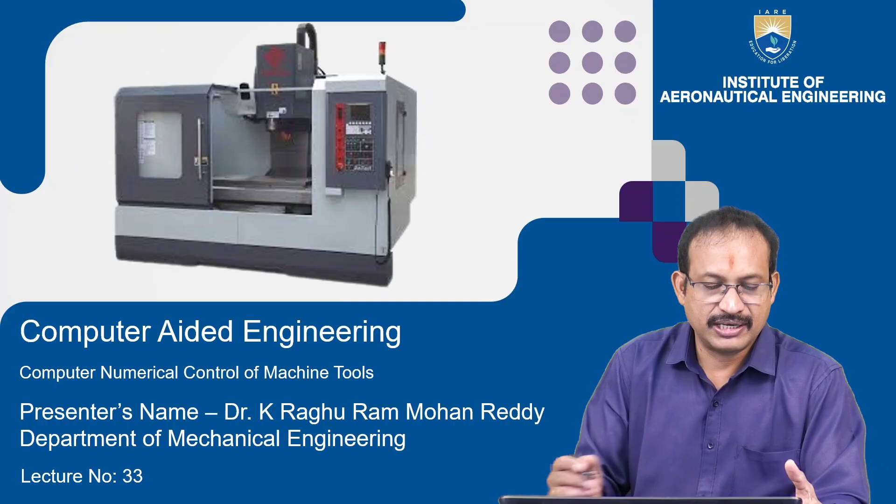The course is Computer Aided Engineering. The topic is Computer Numerical Control of Machine Tools, lecture number 33. In my previous presentation, we have seen the special construction of NC machines. Above NC machines, we have CNC machines. In this lecture, students will be able to explain computer numerical control of machine tools.

CNC. Already we have seen NC means numerical control. That means this is somewhat hardwired. But whereas computer numerical control is software. We'll see.

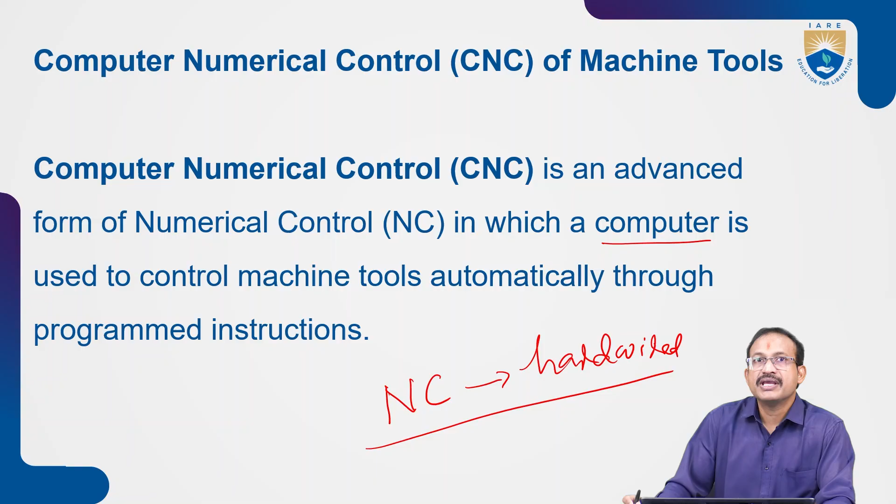Computer numerical control, CNC, is an advanced form of NC control, in which a computer is used to control machine tools automatically through programmed instructions. That's why I told NC is the hardwired. Here we are using a computer. In CNC, we are using computer to control machine tools automatically through programmed instructions.

In CNC systems, machining operations are controlled by computers, software programs, electronic control systems. What are these? Computers, software programs must be built in those computer systems. Electronic control systems to control the machine movements. These will be driven by the computer setups and the software programs.

Computations and all these things will be performed by computers. Software programs will execute or implement the work through the electronic control systems. So the machine performs operations automatically with high precision and repeatability. So this is all about the CNC, computer numerical control.

When compared to NC machines, CNC systems are advanced. Here we are using a computer system, software programs, and electronic control systems. There also we are using program of instructions, but there it receives the program of instructions on the punch tape, olden technology. But here the technology is advanced.

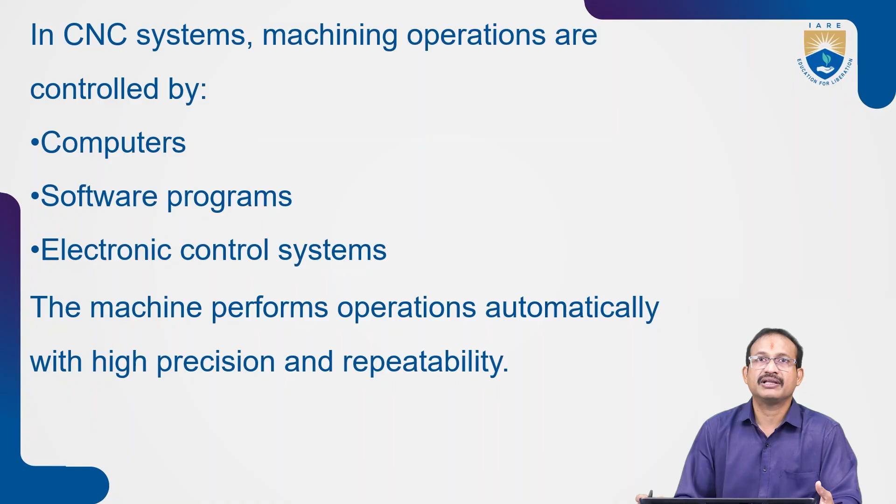Here we are using computers and software programs. So prefixed programs would be available in the machine itself for regular operations. Else the operator or the manufacturer can write the program and build it in the computer systems for repeated operations. We'll see the definition of CNC.

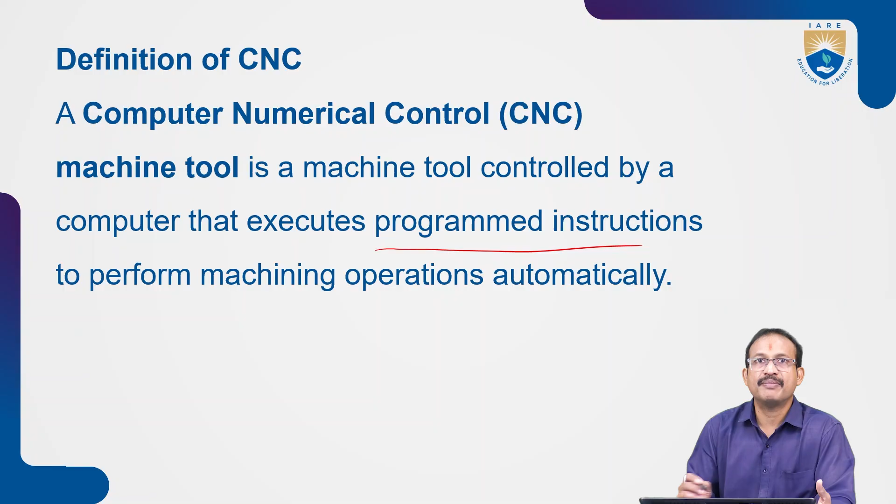A computer numerical control, that is CNC machine tool, is a machine tool controlled by a computer that executes programmed instructions to perform machining operations automatically. So here no human intervention. The program of instructions will be received by the machine tool through machine control unit, and the machining operations are performed automatically. Basic concepts of CNC.

In conventional machines, the operator controls machine movement manually. In traditional machines, the operator has to control the machine movements manually. In NC machines, instructions are given through punched tapes.

These are not reliable. Why? Because we are punching on the tape, so we are using those olden punch tapes to receive the program of instructions in the NC machines.

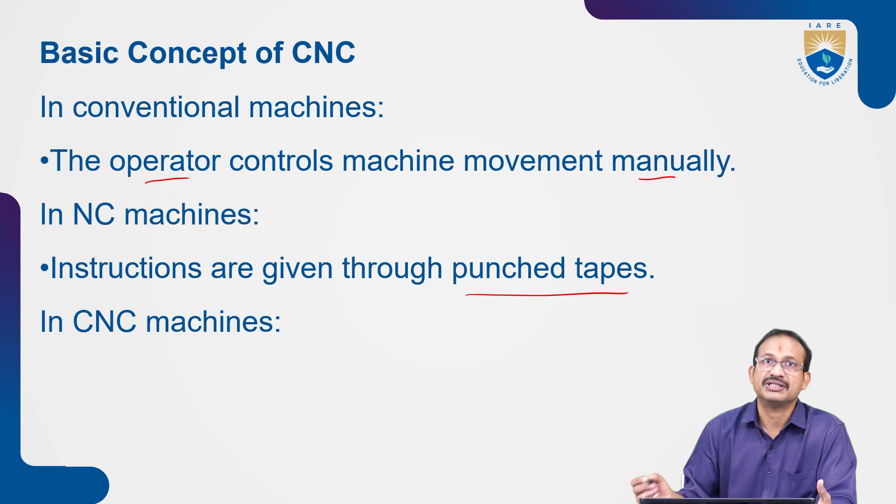But in CNC machines, the computer controls tool movement, feed rate, spindle speed, tool changing, machining sequence. A computer stores and processes machining programs digitally. The computer controls all these things: tool movement, feed rate, spindle speed, tool changing, machining sequence. All these are taken care of by the CNC machines.

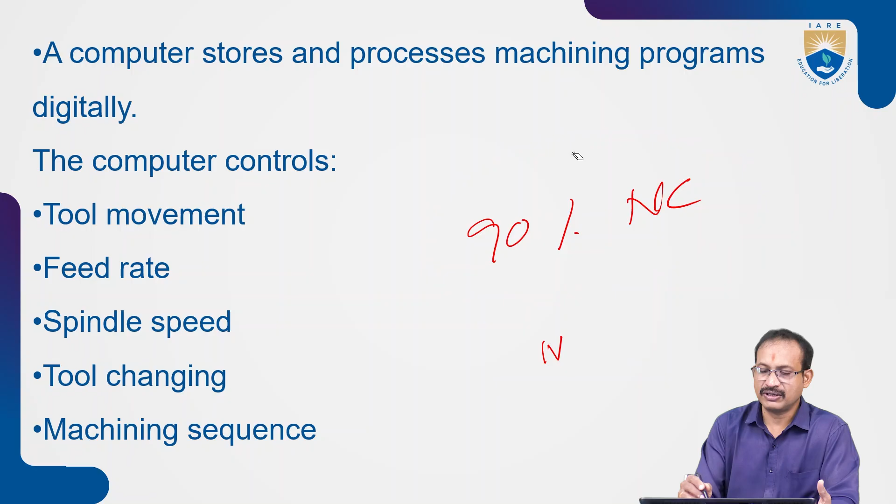Almost 90% is similar to NC, but additionally here the computer systems and the corresponding software systems, along with the high-end electronic systems, perform all these tool movements, feed rates, spindle speed, tool changing and machining sequence. Here tool changing is not in NC. All other things are as usual, but tool changing is not in the NC.

Even high-end tool movement and feed rate are also not possible in the NC machines, but here, when compared to traditional machinery, these are okay. But when compared to CNC, NC machines are a little poor.

Evolution of CNC technology: conventional machines were fully manual operation. Numerical control, NC, introduced numerical programming, used punched tapes. This is the problem here. Computer numerical control uses computer memory and software, more flexible and accurate. Here the program of instructions are not through punched tapes in CNC machines.

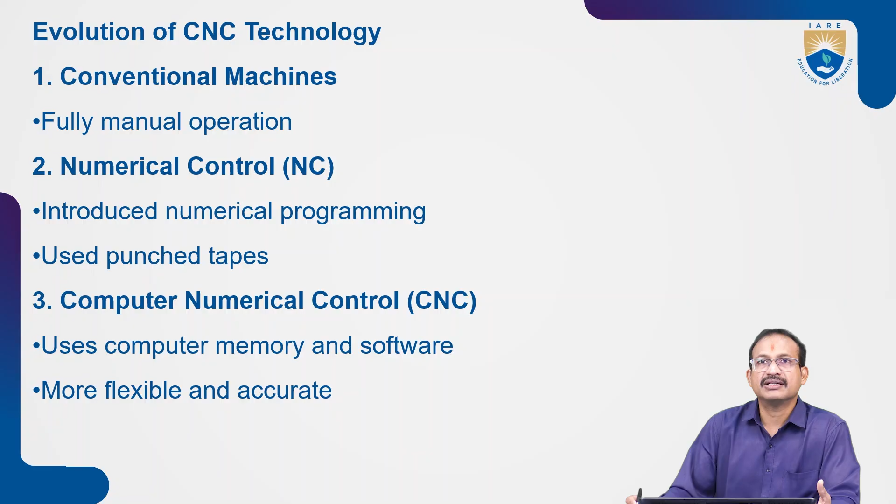We can give the code in the pen drive itself. The machines can take those inputs and give the work. Right. Main components of a CNC machine tool: input device, used to enter the program into the CNC system. That is the tape reader. Examples: keyboard, USB drive, network transfer, CAD/CAM interface, or tape reader will take the input.

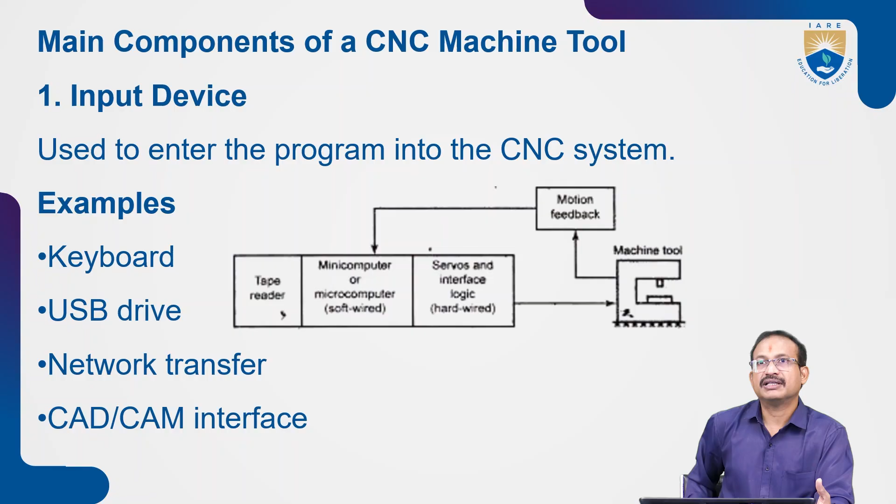First we have to give the program of instructions to these CNC systems through input devices: keyboard, USB drive, all this. How will this tape reader work? What does a tape reader do? It reads the tape. Earlier we used that one, but later it changed. Okay. Now, the machine control unit.

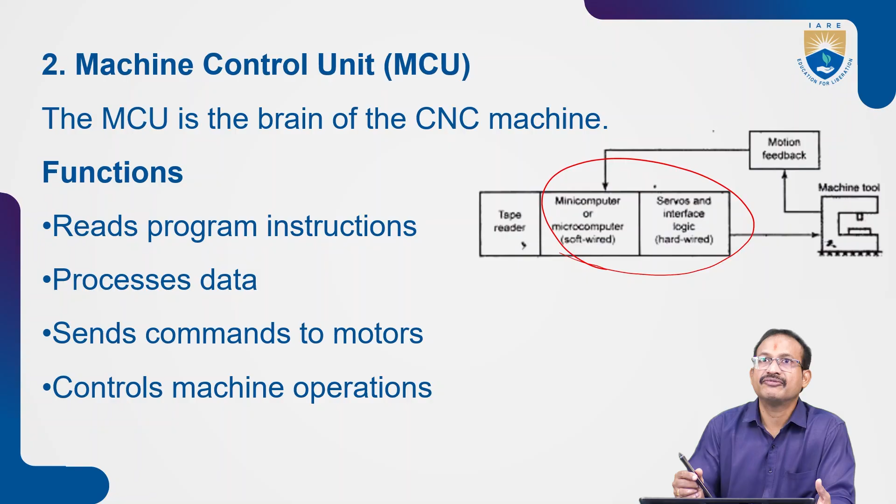The MCU is the brain of the CNC system. Functions: reads the program of instructions, processes data, sends commands to motors, controls machine operations. So CNC machines have software and hardware. The program of instructions will be received by this MCU, and it transforms this program of instructions into electrical signals. So through these servo systems and hardware and software systems, it will operate the machine tool.

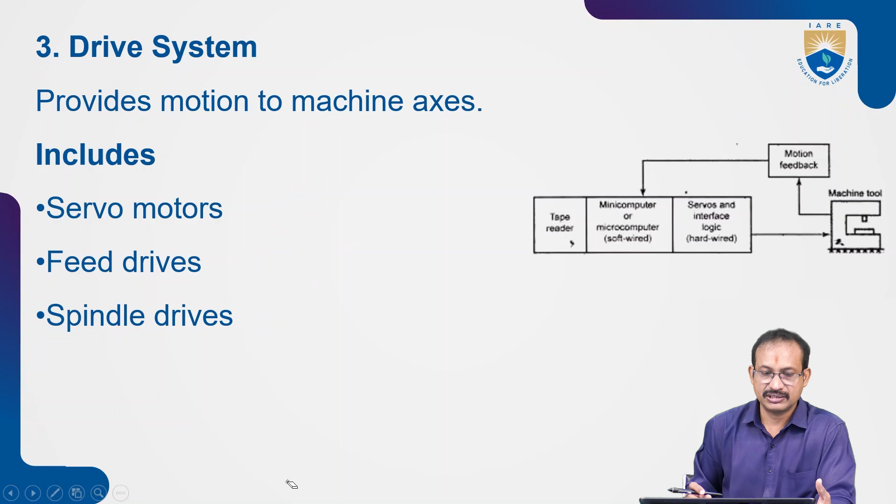Drive system provides motion to the machine axes. Various drive systems will be inbuilt in the machine control unit and machine tool setup, so that servo motors, feed drives, and spindle drives will be operating through this drive system. Machine tool, this one is final. The machine tool comprises all these setups, the drive systems. These drive systems will be activated through the machine control unit's instructions or orders. The machine control unit converts the program of instructions into electrical signals.

Machine tool performs the actual machining operation. Types: CNC lathe, CNC milling machine, CNC machining center, and CNC grinding machine. CNC means computer numerical control. In the present days we are using CNC; we are not using NC machines nowadays. All those NC machines became obsolete, outdated.

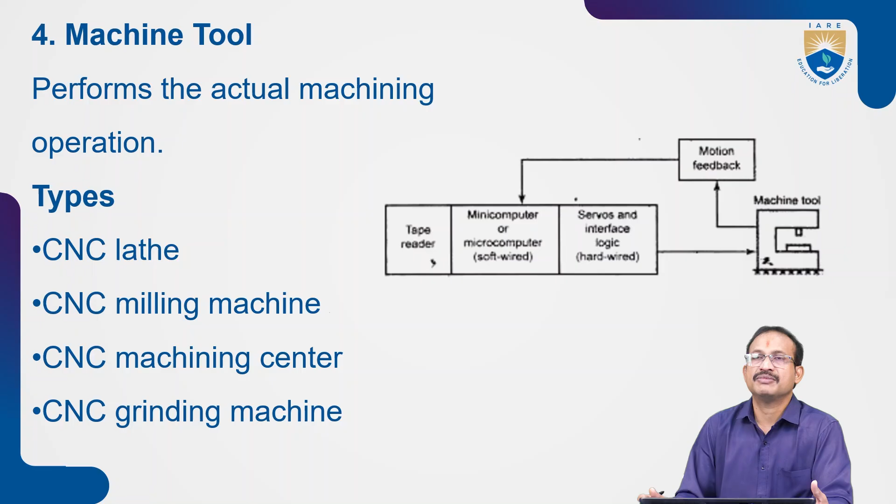Now we'll see the feedback system. It measures actual position and speed. Let us say this is a workpiece. I want to start my work from this point to this point. We have to bring the tool from home to this position. It has to measure whether it is reaching the desired position or not. It has to check, and the moment it receives, it gives the feedback, motion feedback.

Point zero zero one is the deviation; like that it may give the signal. If it is exactly on that point, it will give 0, otherwise it will give the deviation. So the feedback signal will give the deviation. The machine control system, with encoder support, will correct this so that the tool will be positioned exactly in the desired position. And even speeds: suppose the required speed is 900 rpm. The moment we start, it may have 899.95 rpm.

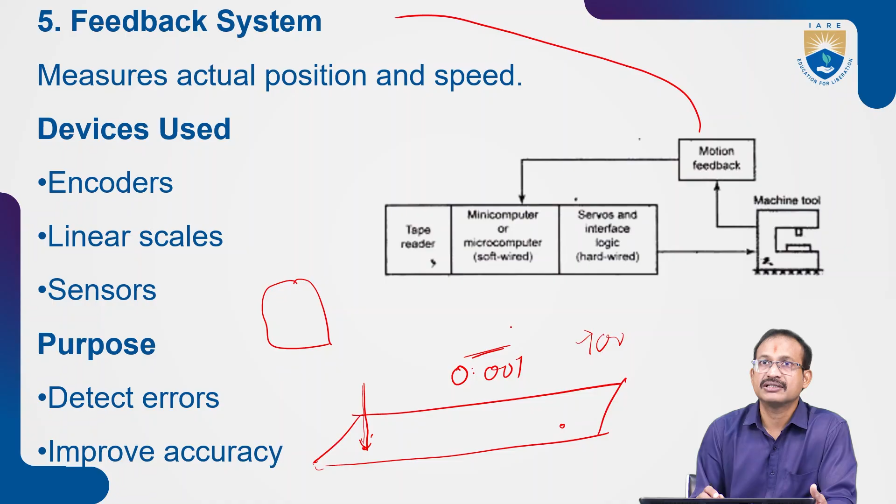So the feedback system will do the same. Again, the internal setup, through encoders and all these things, will adjust in terms of voltage and current signals, so it will reach 900 rpm. Right. Devices used here: encoders, linear scales, sensors. Purpose: detect errors, improve accuracy.

Once we get the feedback, it has to be put to use. Similar to our classroom: the performance of a student is not good. If we get the feedback but we don't change the mode of teaching, or don't take any corrective measures, what will happen? There is no use.

Similarly here also, if the tool is not reaching the exact position, the feedback system will give the feedback: yes, there is some deviation, point zero zero one. So the internal system, all these devices and setups, should correct it. This much voltage difference would be there, so in order to reach that position, we have to compensate in terms of voltage or current. So it achieves exact positioning.

Similarly, towards speed. If the desired speed of the spindle is, let us say, 900 rpm, the moment it rotates, it may have some 890, later something 895. Finally it will reach around 900, but it may not be exactly 900. So this feedback system will give the deviation, and the internal system will compensate to reach the 900 rpm. That is about the feedback system.

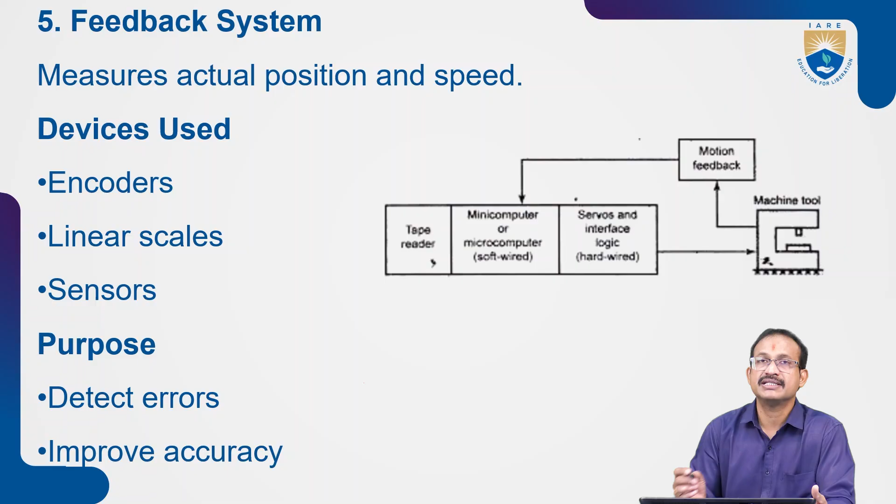Next, machine status. Machine status is nothing but how much lubricating oil is present, how much time it will take to complete that work, and how many hours the machine tool can perform the work. That means without any disturbances, how long these machines can run and how many cycles the spindle can rotate. Every such information will be displayed on the display screen. That is about the display unit.

Through the display unit we can edit the values dynamically. But once the program is frozen and comes to running condition, we cannot change it in the CNC machine. Before going to work, we need to check the simulation. That simulation will be seen on this screen, and we can come to a conclusion whether the given program of instructions is perfectly all right or not, and whether it meets our requirements.

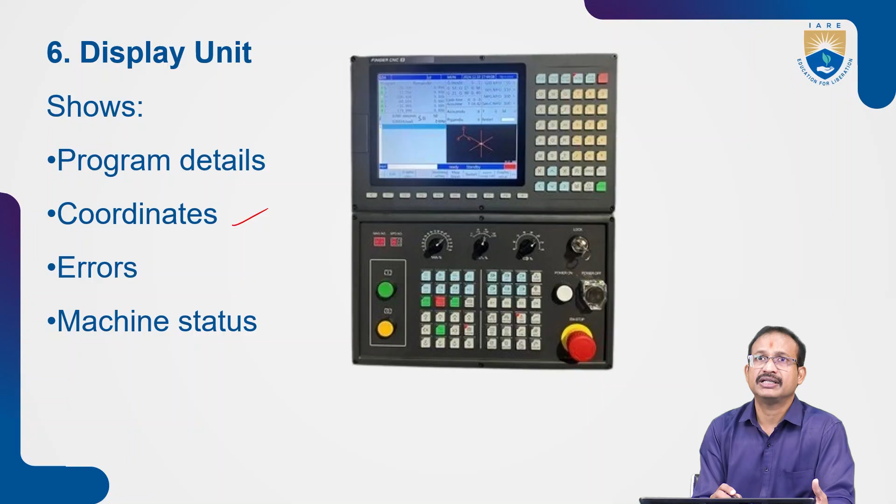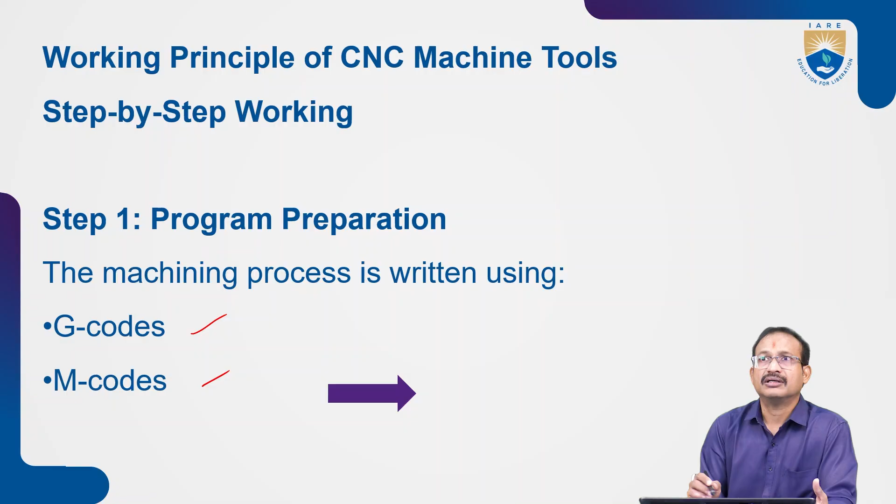Next, working principle of CNC machine tools, step by step working. Step 1, program preparation. The machining process is written using G codes and M codes. G codes means geometry codes, M codes means machining codes or miscellaneous codes. G codes represent X, Y, Z directions, rotational speeds, change of tools, everything.

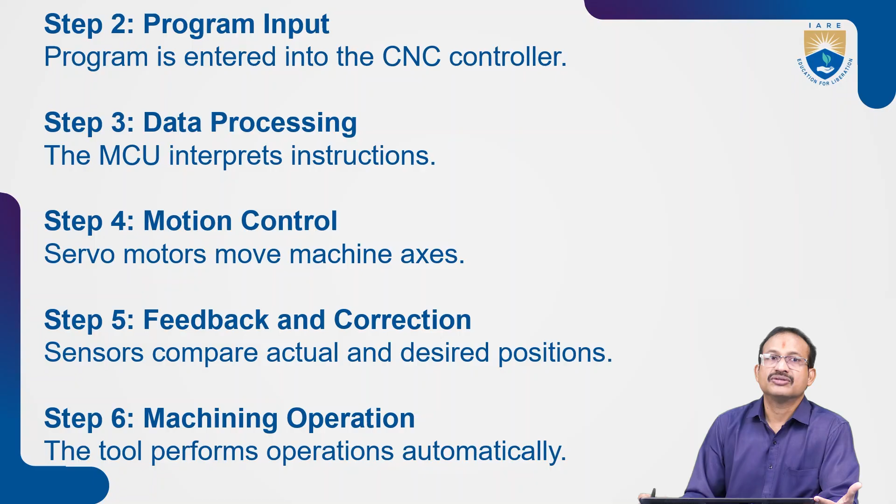Program input. Program is entered into the CNC controller. Step 3, data processing. The MCU interprets instructions. Step 5, feedback and correction. Sensors compare actual and desired positions. That's what we have discussed. Machining operation. The tool performs operations automatically. So these are the various steps.

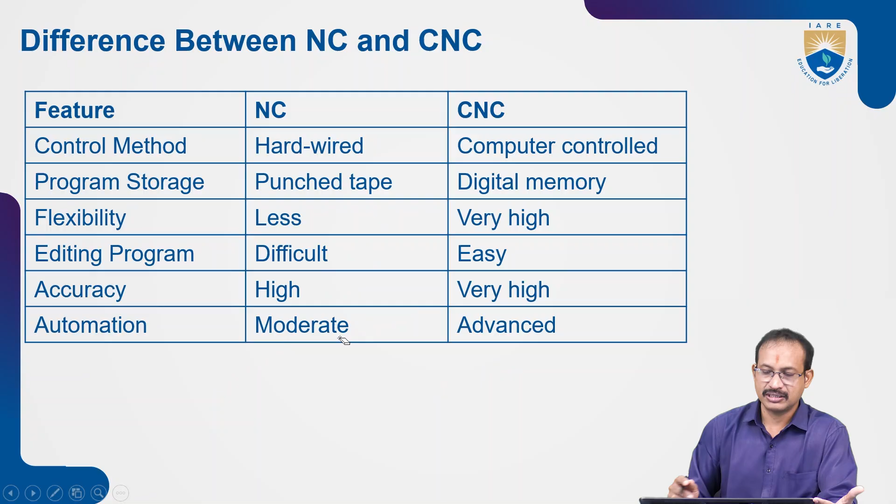We see the other features of the CNC. Key features include automatic operation, high accuracy, multi-axis control, digital programming, and feedback systems, when compared to the NC system. CNC is a computer-based automated machining system used to control machine tools with high precision and efficiency. So this is the conclusion.

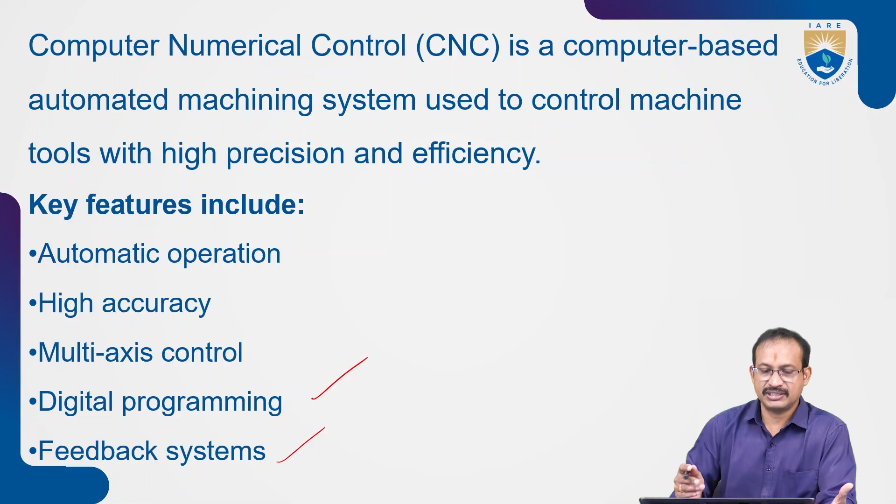CNC machine tools are essential in modern industries because they provide precision, speed, reliability, flexibility, and high quality production. So with this I am concluding about the CNC.